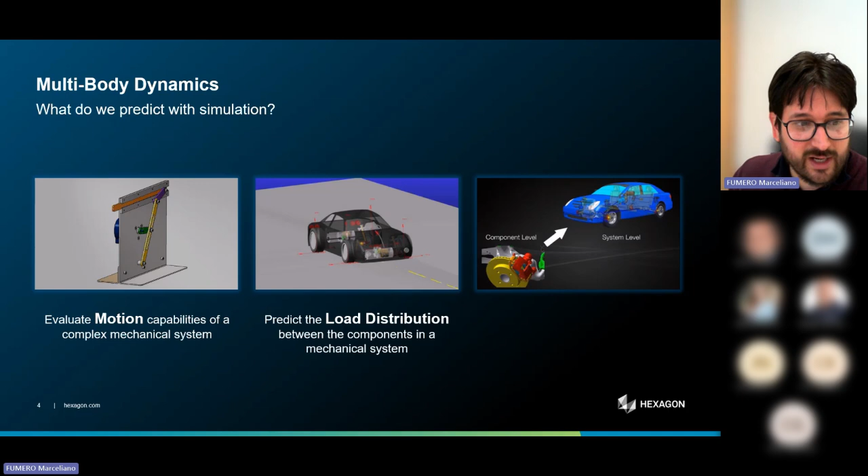I think this is how multibody dynamics was born, and then it evolved into what's probably the main usage of multibody dynamics these days, which is load distribution. When you have a system like a vehicle, for example, the loads that come through the road or the excitation from the driveline, they propagate throughout the entire system.

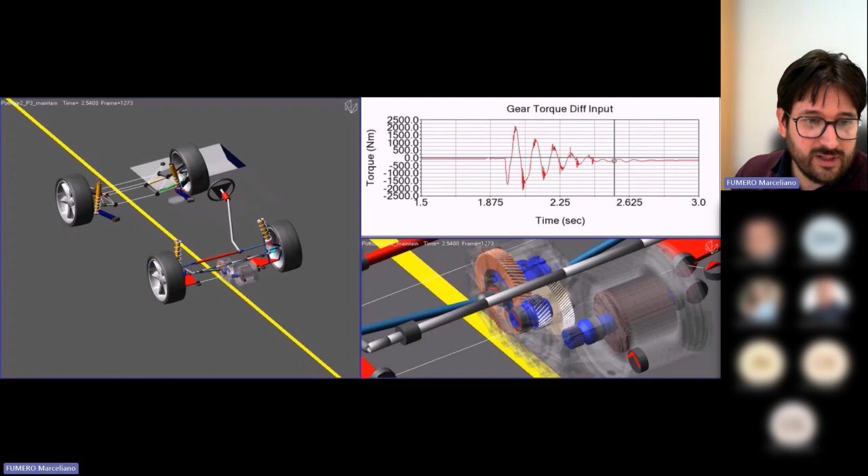And it is important to know what are the specific loads in every single component that the system has, because this is the only way that we can size and design the components appropriately for durability purposes, NVH, etc. So this is probably the biggest area of application for multibody dynamics, and Adams, of course, being part of it.

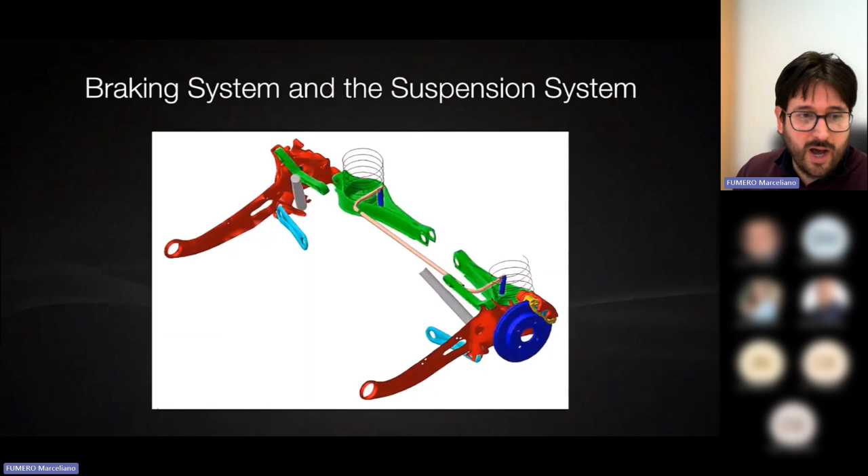And a bit of an advanced usage of Adams is understanding system interactions. So we're talking about interactions that are of a dynamic nature, maybe interactions of natural frequency in different components that can actually trigger problems in the behavior of the system. And these are really difficult to predict until the whole system is put together.

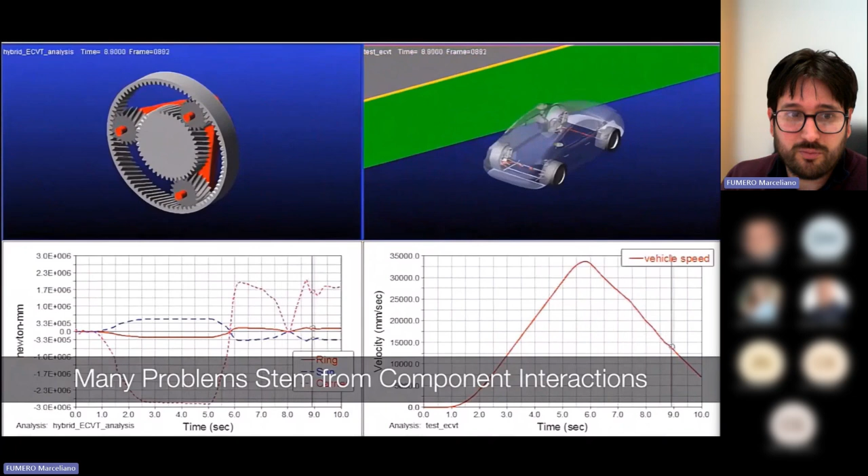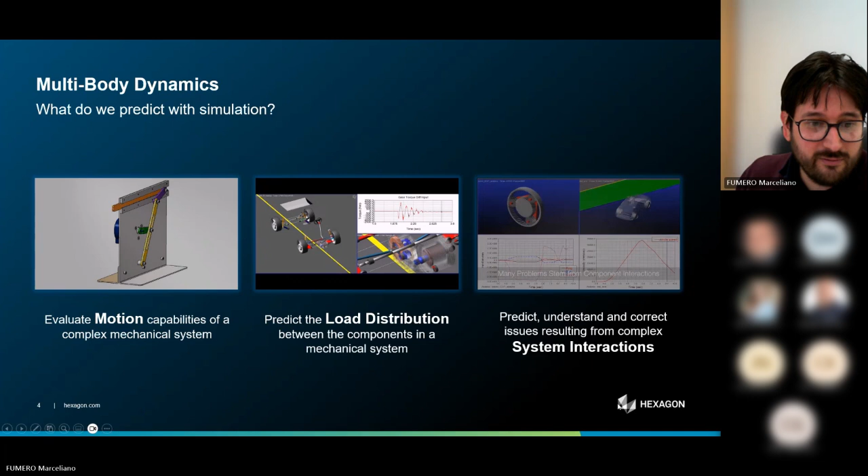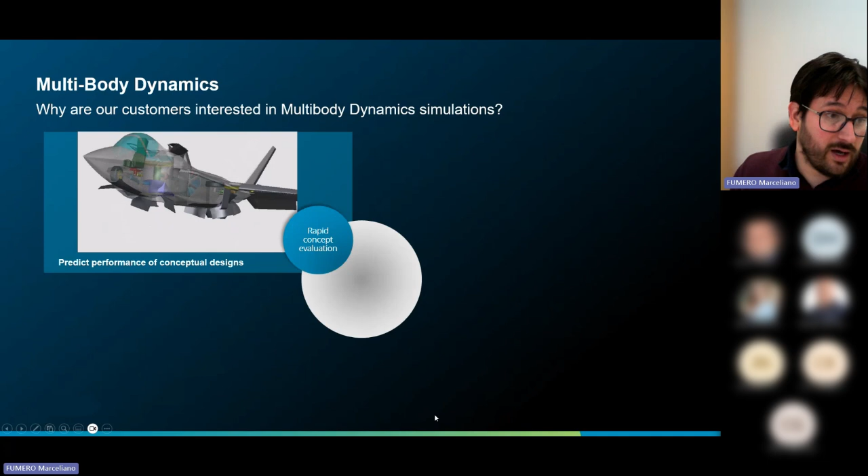So Adams multibody dynamics is a pretty good way of basically predicting problems that could arise from those interactions, and obviously evaluating changes to the design that can fix those problems. So those three things, from an application point of view, usually lead to either improving the process of defining a conceptual design for a product,

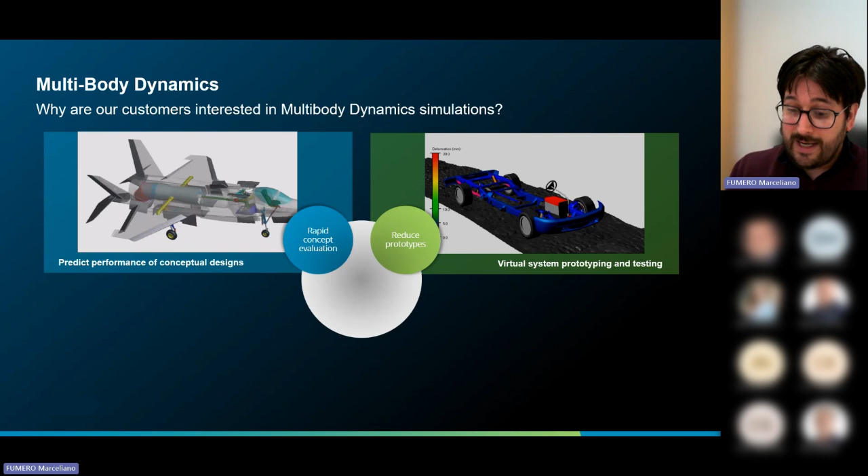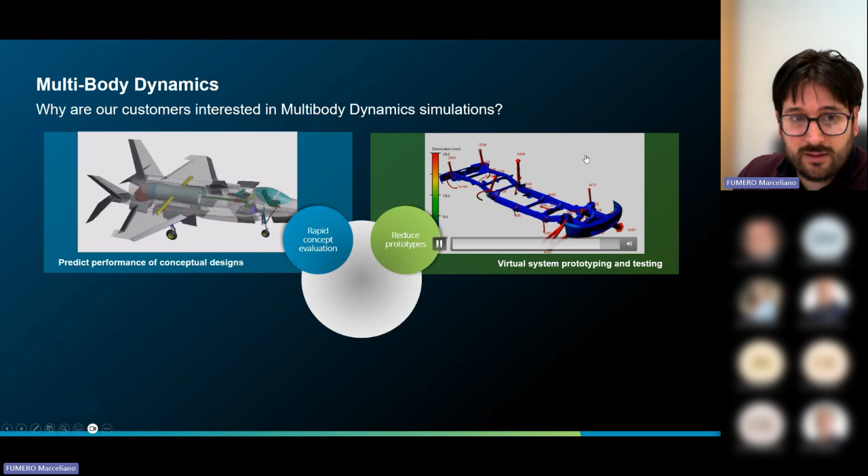reducing prototyping. Once you go after the conceptual design and you have a system that works, you need to evaluate it. Traditionally, you would do that with prototypes, but we see lots of our customers actually eliminating some of the specific test campaigns that they use, because all you have to do is basically make sure that the model is a faithful representation of the product, and then you can perform the same tests in the virtual environment that is quicker and cheaper.

Durability and NVH analysis. So this is, like I said earlier, deeper or more complex applications of multibody dynamics to find solutions to problems that involve system interactions. And finally, and this is probably one of the biggest areas of growth for us at the moment, is control design. Actually, not control design. Multibody dynamics is not a tool for the design of controllers, but the multibody dynamic models are ideal for evaluating if a controller works or not, basically.

Instead of plugging your ECU to a machine or to a vehicle, to a product, you just connect it to a virtual version of the product, where you can perform as many tests in parallel as you want, or do all the calibration and check the measurements of physical variables to see that your controller delivers the requirements, essentially.

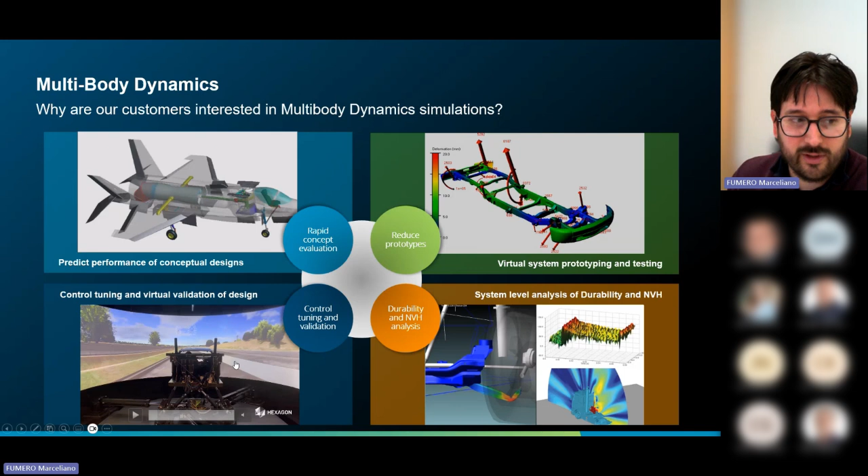So everything that I've said so far could be said about any multibody dynamics tool, and as you might know, Adams is not the only one in the market, but it is the #1 tool in the market for this. And the reason why it is the #1 tool, well, I think there are many reasons, and part of what we're going to discuss today hints into that. But I think the main reason is heritage and legacy.

So Adams is the oldest multibody dynamic tool in the market. We say that it has over 40 years in innovation, but we know we're very close to the 50th anniversary, which we're looking forward to celebrate. And obviously 50 years of development translating to a maturity that allows us to cover many different applications in many different industries. And this is really what differentiates Adams from most other software in the market.

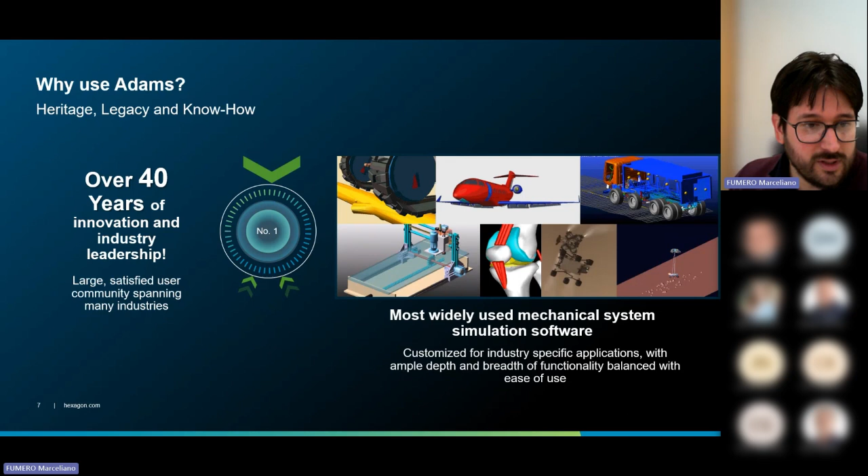A few specific, not testimonials, but projects that went well and we take a lot of pride in are, we have a use case with Airbus in which the European Aviation Safety Agency actually allowed Airbus to replace physical testing on wings with virtual testing using Adams. And this is a type of test that involves safety of the passengers. This is basically to ensure that when the wings are bent, all the actuation systems still work as intended. So the fact that Adams was trusted to replace real testing in real life for that is a big thing for us.

The trust that the automotive industry has placed in Adams is something that we're very proud of. I think we say that 24 out of the top 25. I don't know if that is still an updated case, but all the new players coming into the automotive world seem to have an interest or directly be using Adams already. So that's a big thing.

And this is a bit of an oldie, but something that we're very proud of. Adams was used to replicate the landing procedure for NASA JPL, the Curiosity rover campaign on Mars. And this is interesting because this is something that couldn't be tested in real life because obviously the atmospheric conditions on Earth are very different from Mars. So they had to rely on this virtual test in order to make design decisions. And the campaign was a success, as we all know now. So knowing that Adams had something to do with it is something that we're very proud of.

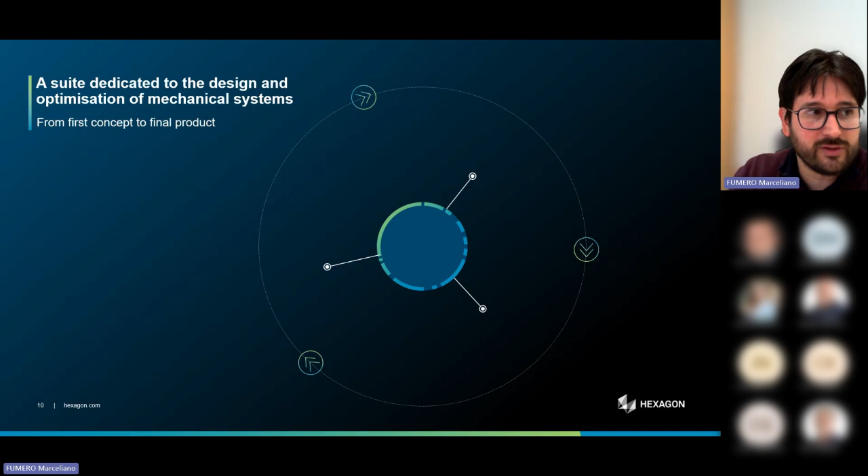So now I'm going to start talking a little bit more technical about the product. If you haven't seen Adams yet, and even if you have seen it, this might not be evident. Adams is not a standalone tool. Adams is actually a suite of products. And that suite covers solutions for creating multi-body dynamic models, including flexible bodies.

It includes tools that are dedicated for the integration of models that are not inherently mechanical, such as controls or multiphysics integration when we have loads that are generated from fluids or pneumatics, for example. We can integrate that into the entire simulation, obviously with a focus on understanding the mechanical design. But still, those boundary conditions are important, and these tools allow us to do that integration.

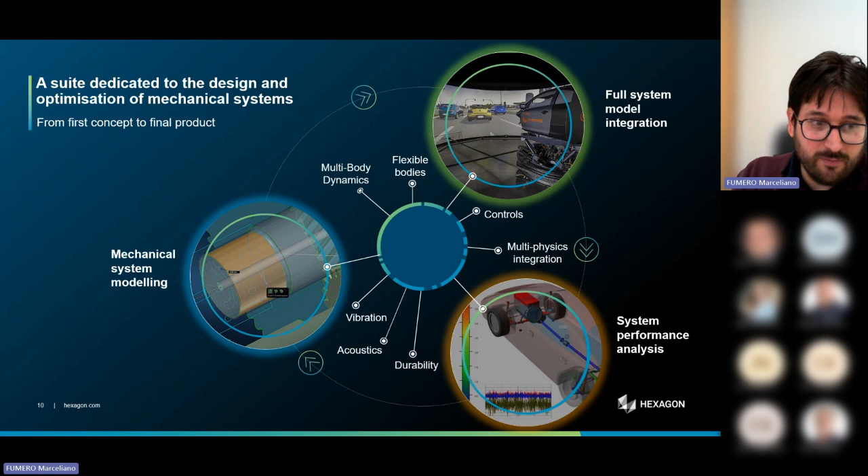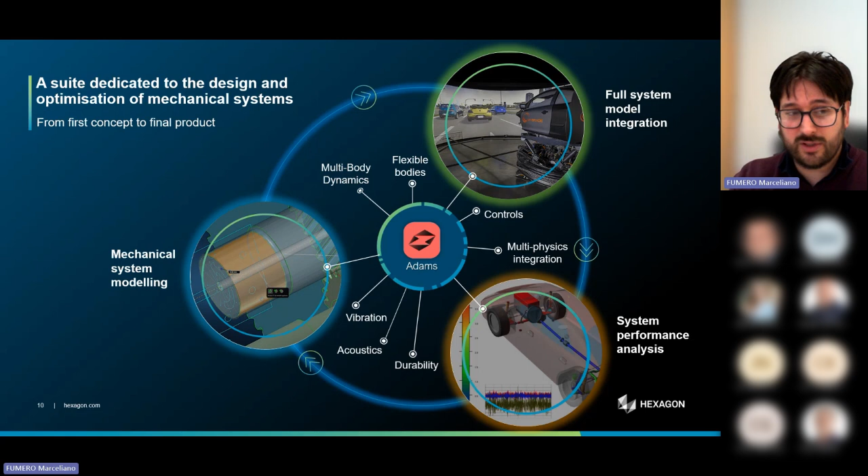And then obviously, once you have a model, what you want to do is run it, post-process the result, and that's how we get insights. So we have specific tools for the analysis of the data in order to improve durability, acoustic performance, NVH. All of that is Adams altogether. And I would like to very briefly go through what those products are, simply because when I start talking about the key developments, some developments are focused on some specific products. And it's good to know what we're talking about, basically.

So I will start with the tools that are dedicated for modeling specifically. We have Adams View and Adams Modeler. These two are almost exactly the same, but with different GUIs. So Adams Modeler was released with the intention of replacing Adams View. It's a modern-looking, more intuitive interface for Adams. But we have so many existing users that just love the Adams View interface that we had to actually keep it running in parallel with Modeler.

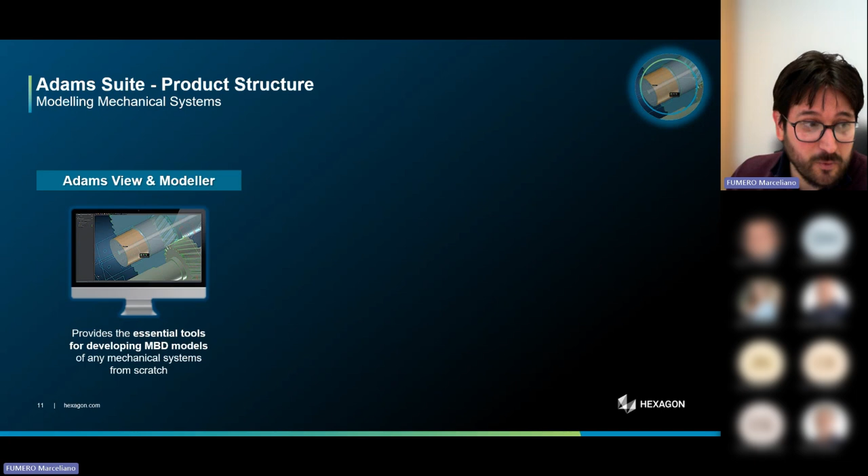So if you've never tried Adams before, I recommend you to go straight into Modeler. It should be easier to learn. But if you're using Adams View and you like it, it's there and it will be there for the foreseeable future.

We have Adams Machinery. This is actually an add-on, but it's interesting for mechanisms that are typically found in many different products, like electric motors, gears, bearings. Adams Machinery allows us to generate the models almost automatically based on parameters. So you don't have to have a CAD or geometrical data to create those models. As soon as you provide the type of data that you normally get from a data sheet of the product, the software will generate the model automatically, and then that can be integrated with the rest of the model of your machine, your vehicle, your aircraft, whatever it is.

And finally, for the automotive world, we have Adams Car. It's one of the biggest seller tools that we have. Essentially, it provides templates for stereotypical assemblies of suspensions, chassis components, drivelines, and even vehicle bodies that can be easily assembled and customized to generate entire vehicle models, which otherwise, if you were trying to generate from something like Adams View or Adams Modeler, could be done, but it would take a considerable amount of time compared to this.

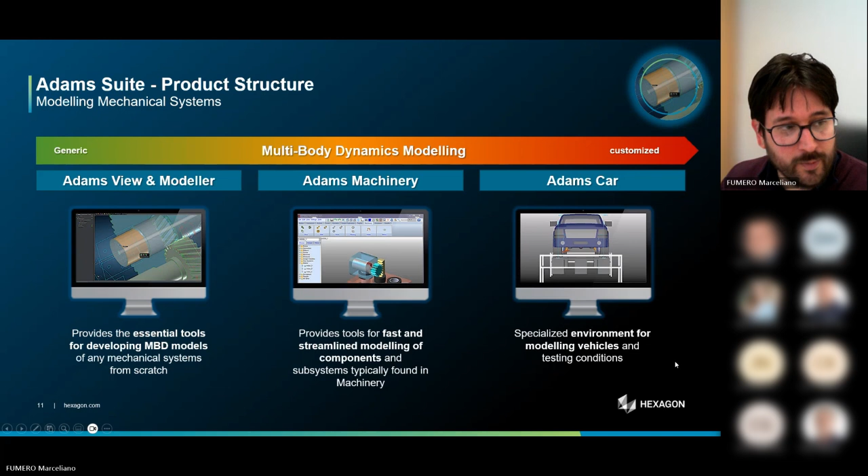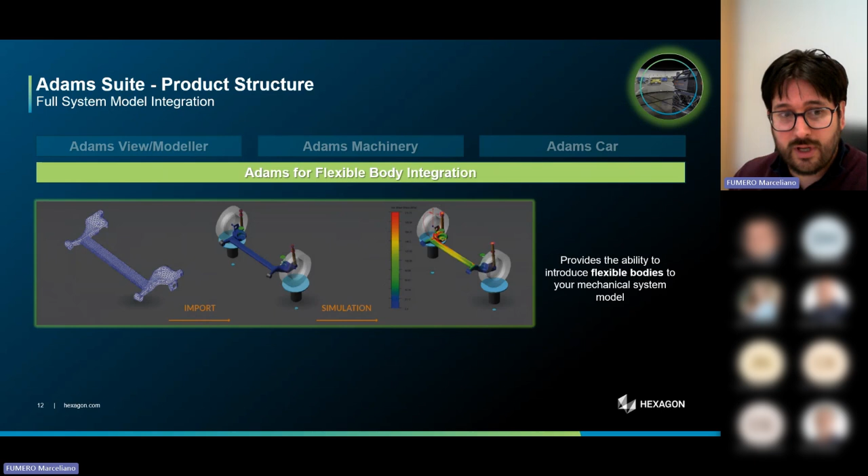So the idea of having these different interfaces is to offer the possibility to do the modeling in a generic way that allows you to model pretty much anything that moves, or a highly productive way of modeling systems that we all know pretty well. In addition to that, for all of these tools, we have what we call horizontal capabilities, and this is where integration comes in. We have the ability to integrate flexible bodies when the flexible body is expected to have a strong impact on the behavior of the system.

We have the ability to integrate controls. Typically controls are modeled in 1D. I'm not sure if you're aware of that, but 1D offers a pretty good platform to model both the control logic and the actuation system, whether that actuation system is electrical, pneumatic, or hydraulic. So once you have that full definition of how the controller works, you can plug it into the mechanical part of the system, which is what we do in Adams, and then you have a full representation of the product in the virtual world.

Equally, we can actually take that entire system and export it into what we call real-time simulations. I'm not going to talk a lot about that because a big part of the development of 2024 and 2025 is related to real-time. So we'll be going through that in a fair amount of detail in a few moments.

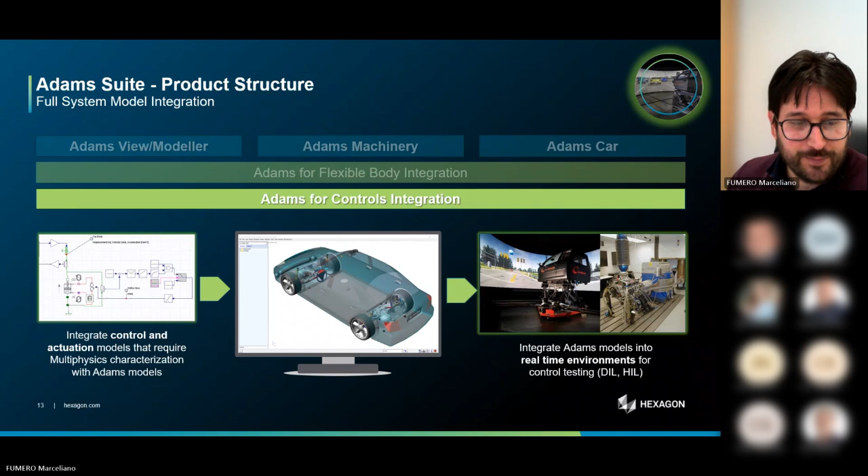We have tools for advanced co-simulation. This is where we leverage our relationship with other tools like Actran, Cradle, etc. And this is mainly to define, in most cases, boundary conditions. We have the ability, for example, in heavy machinery, to characterize solid to soil contact in order to have a good dynamic definition of how operating conditions like the one in this video will be.

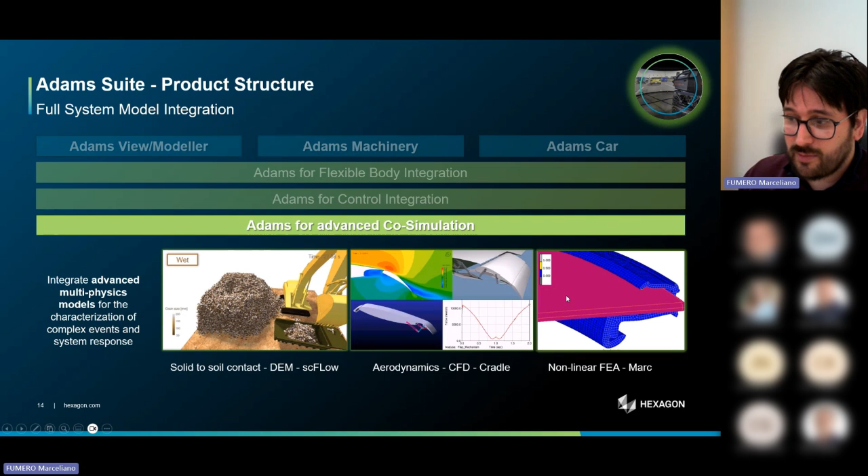We have the possibility to introduce aerodynamics or fluid loads that affect the behavior of mechanisms, as we can see in this little video there. And then within the mechanical model itself, we have the possibility to integrate non-linear deformations. For example, this is a window going through the rubber that covers the window in a vehicle, and the resistance of that rubber is highly nonlinear. Characterizing that in Adams requires the multibody dynamic aspect of it and the nonlinear behavior in order to get a good representation of what is happening.

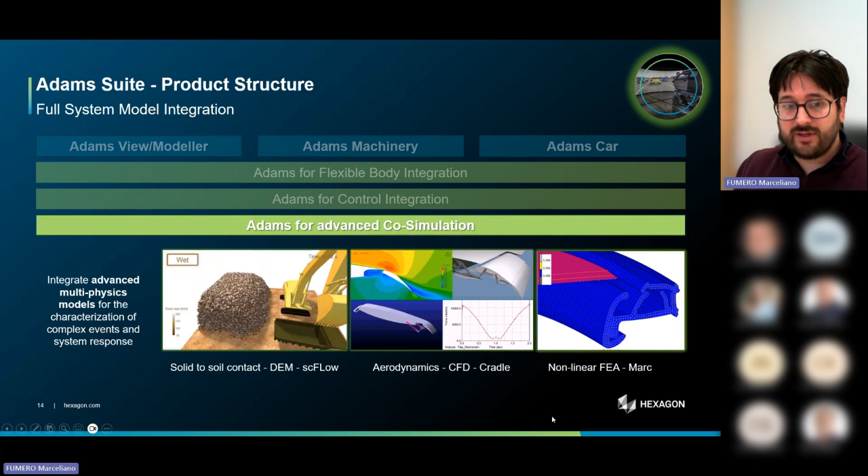So that covers everything that is related to modeling. And then, like I said, we have tools dedicated to the analysis of those models. In its basic form, we can animate the system. We can plot the transient results in order to get insights into what is happening. This is pretty much like looking at the results from a real prototype in a test bench.

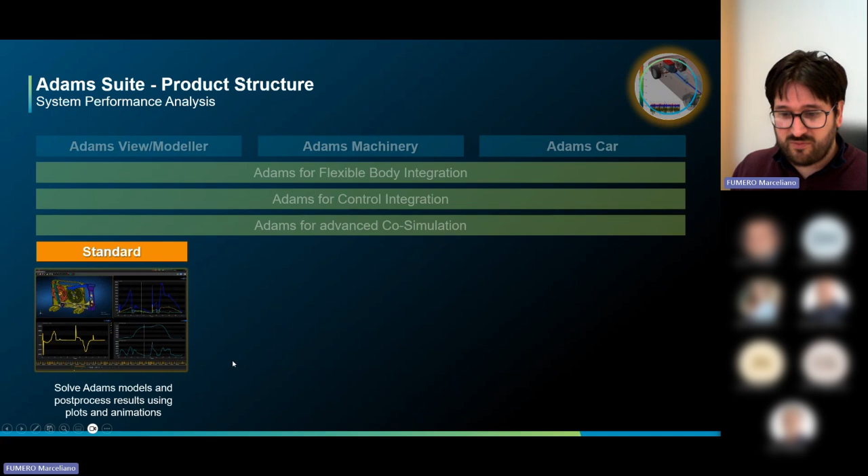We have tools that are dedicated to doing durability analysis. Vibration analysis, once again, I'm going to be talking a little bit more about vibration and acoustics later. So if you didn't know, this is something that multibody dynamics also covers. And once again, it's an area of focus at the moment, or growth, when it comes to the development of the product.

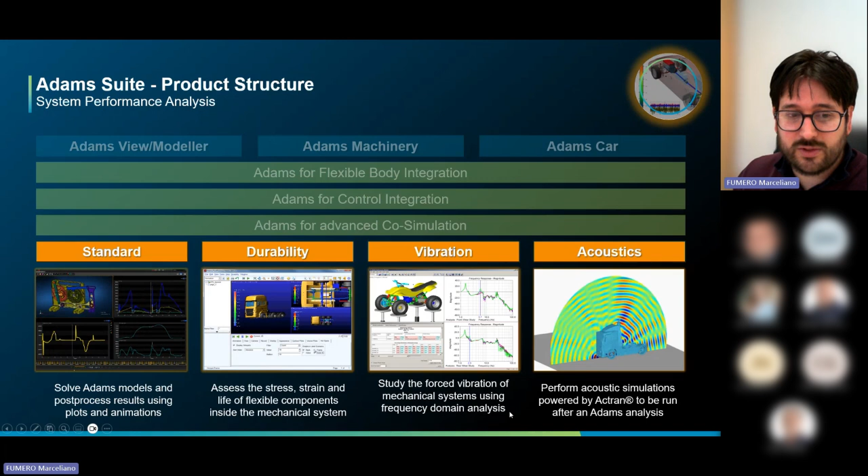So that takes us to what are the key developments in Adams for 2025. I say 2025, but some of it, especially the real-time conversation that we will have, also covers 2024. This is something that has been evolving very rapidly over the past couple of years. But it's still in a phase where lots of customers are just finding out about it and adopting it. So I think it's a good opportunity to talk about that.

All right, so there are 3 key areas of development that I'm going to cover today. The first one is Adams going into the cloud, and this is probably the newest thing that I will be discussing today, because it's something that we never did before. Up to now, Adams is on your machine and nowhere else. The intention, like with many other software, is to move a lot of this capability into the cloud, eventually giving you access to Adams fully through a website. But we are not there yet. So today I'm going to explain what this initial implementation of Adams in the cloud is and how it can help increase productivity, agility, and collaboration.

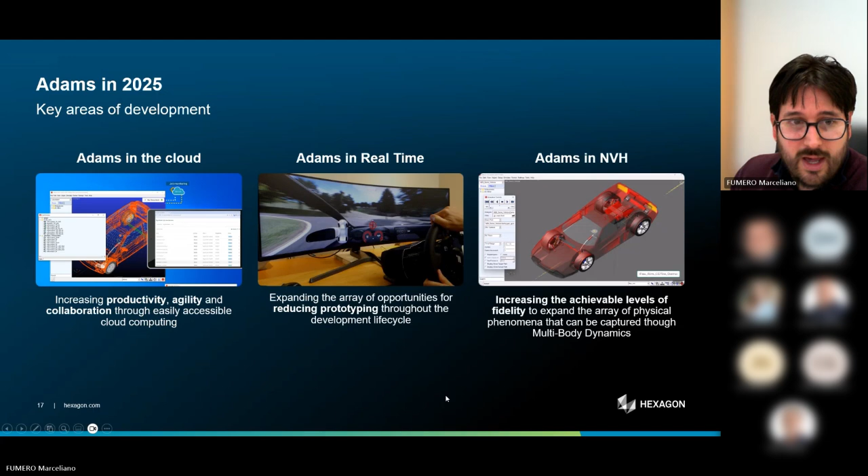Then, like I said, I will discuss in more detail what Adams in real time means and how you can use it for the benefit of improving the design process and reducing prototyping. And finally, Adams for NVH. This is not new to us. This is something that has been done for quite a while. But because NVH, acoustics, vibration, requires higher levels of fidelity in the model, and in some cases capturing complex physics in the model, it's something that is always evolving.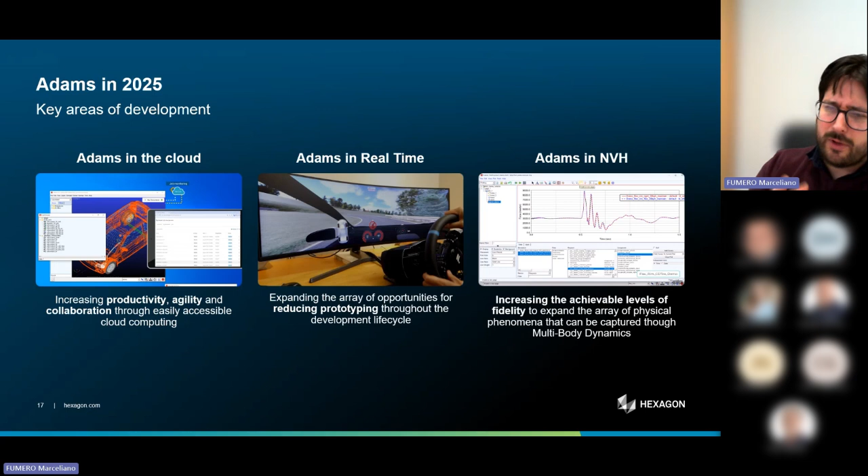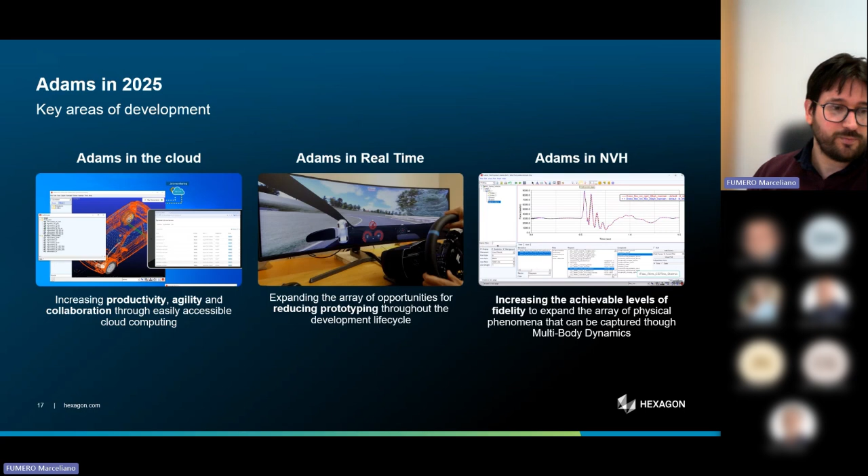Essentially, customers keep coming back with new challenges for us, and we basically implement new features to make sure that we can use Adams for whatever our customers need. So I will be covering a few specific developments that are aimed to improve not the accuracy, but the fidelity of the models that we generate in Adams. So let's dive into there.

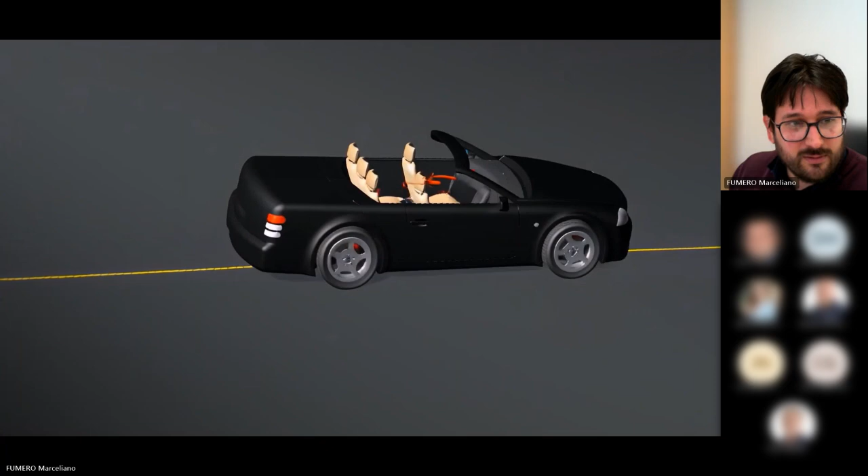First of all, I'm going to talk about Adams in the cloud, and this is funny. This is a video that is about to be released online. You're the first ones to see it, and it's just a teaser to what is coming. So coming soon, to be very specific, means, if I remember correctly, I think it might be the 17th of next month. So it's very soon, less than a month away from the release of this capability. Oh, sorry, move forward.

So what's Adams in the cloud? I don't know if you have heard about Nexus so far. I'll show you very quickly what that is. Nexus is the portal that Hexagon has been developing over the past few years to interact with the customers online. So if you are a customer of Hexagon, you should be able to access this site and sign in. And in there, you will find lots of things, really.

You can download any software you like. If you don't have the licenses, obviously, you cannot use it, but you can request licenses through the site and initiate a sales conversation with us. You have documentation for the software. Let's see if I can find the product, maybe.

Oh, lucky for me, Adams is one of the first ones. So if you go to the Adams site, for example, this is where you can see a bit of information about what it does. It will give you a link to our documentation center. It will point you towards other tools that closely relate to Adams. And it will give you access eventually to Nexus Compute, which is what this implementation is all about.

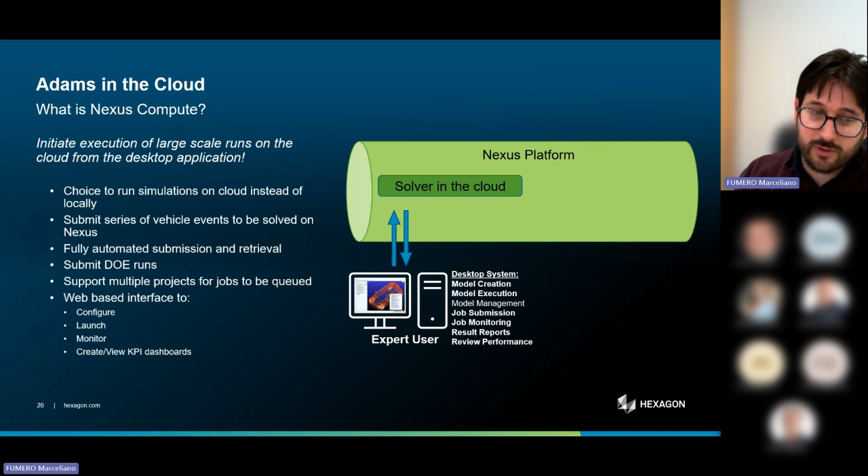With Adams in the cloud, what you can do is click run, send it to one of our servers. The model gets run in there, and the results are sent back to you. I'll tell you in a minute why that is useful. But before I get there, the other thing that you can do at the moment with Nexus Compute is to take the results, and instead of doing plotting with the Adams post-processor, we have dedicated post-processors on the cloud that can be used to manipulate the data that the model will generate.

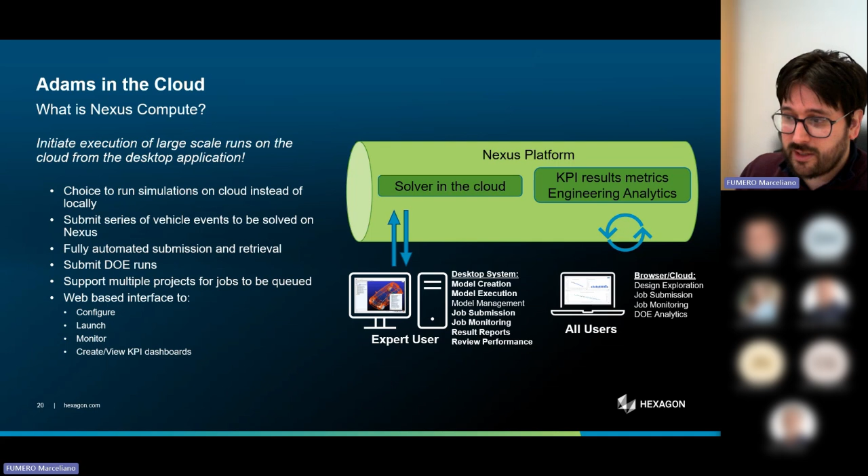So why is that useful? Well, let me show you the 3 applications of this. One thing is what we call just run it. I want to show you a quick video of how it works. So as you can see, in the next release of Adams, you will have this Nexus button in there. If you have a Nexus account, you can log in.

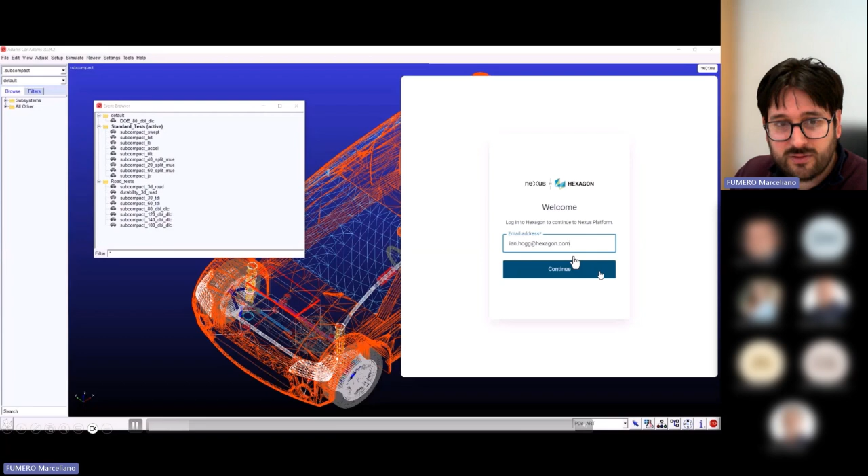You can have a project or a place where your data and your models will be saved. And then from Adams in your desktop, you can send or submit your jobs into the cloud. So this is very similar. If any of you has ever used a high performance computer that is installed as a server in your organization, this will be the same, but instead of going through an internal server, it goes through our servers. And essentially we will charge for the amount of time you use the server.

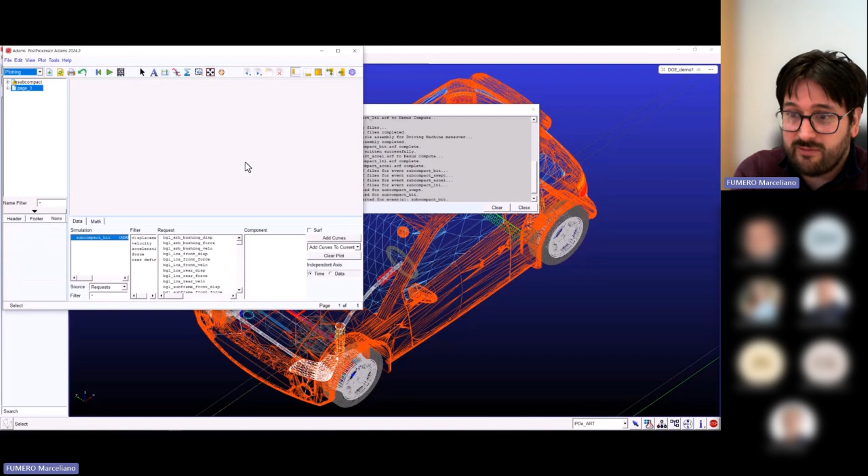That's it. In a situation like this one, the one that we're looking at in the screen, where you are simply running your model in Nexus, the only advantage you get is that if you have a model that takes a long time to run, and as you know, especially when you include flexible bodies, models can take up to hours to run, your machine doesn't have to be locked in the simulation. If you send it to the cloud, the machine is free for you to continue doing modeling work, anything you need. And when the model is ready, it's sent back to you.

Also, the high performance computers that we have in the servers obviously will reduce the running time considerably compared to a normal desktop or a normal laptop, which is what we normally use. And as you can see, sorry, I missed something from the video while I was talking. Yeah, the results can be retrieved back and analyzed in Adams just like you would if you were running in your own machine. So it's not a major disruption. It's just a tiny step simply to make sure that you don't lock your machine there.

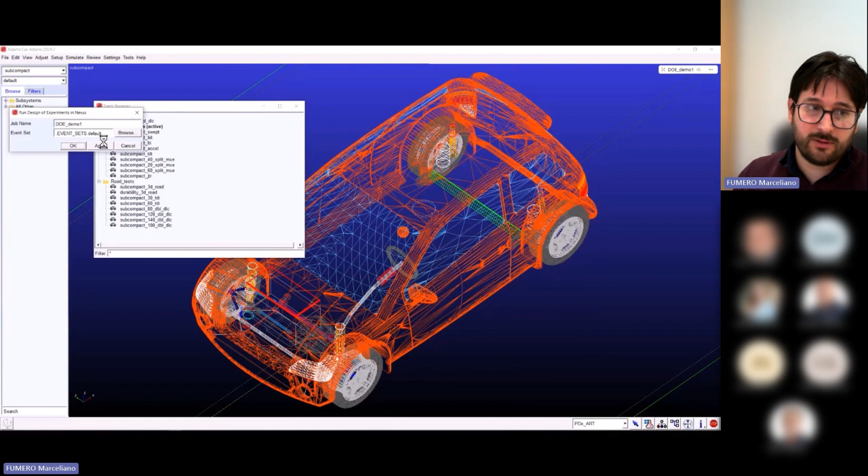This is useful, but this is very useful for DOE. So now when it comes to DOEs where you have multiple runs, running in high performance computers gives you the ability to make many runs in parallel. And if you have a big study with a large number of runs, this can reduce the overall time of getting the results dramatically, from maybe days or weeks to hours.

So as you can see in the video, when we run it this way, the model is sent to Nexus and all the parameters in the model become available in the Nexus interface. So in there, you can decide which parameters you want to use for your design of experiments, which is what is happening right now. You can define, just like in any optimizer or design of experiments facility, the maximum value, minimum value, the type of how you want to use the data.

Once you define the scope of your study, which is about to happen very soon in the video, you move into defining your objectives or the outputs that you want to generate from this study. In this case, we call it KPIs, and this is what is happening here.

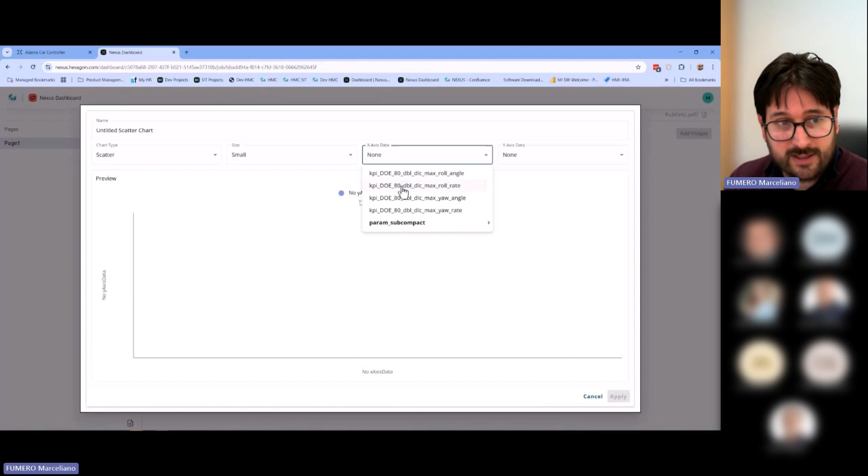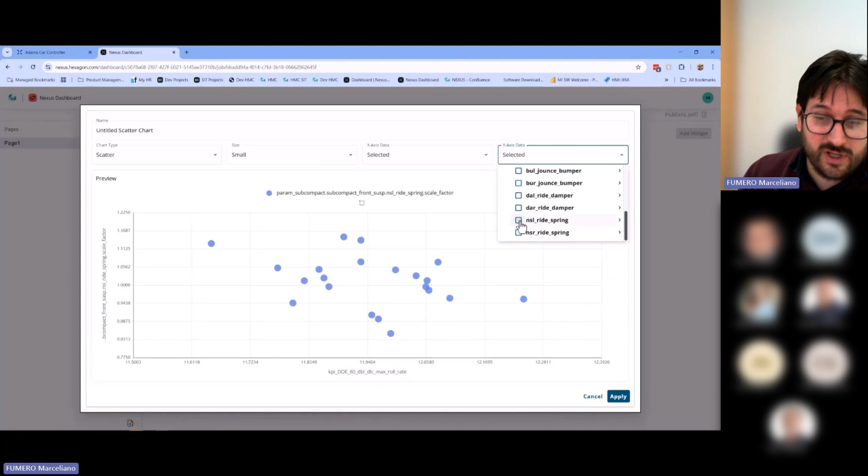What that means is that if you submit a model into Nexus, someone who doesn't really know how to model or who doesn't have any experience with Adams can still use that data to assess whatever they need to assess in order to make engineering decisions about the product. So it's a great way of sharing the CAE work with people who are not necessarily experts in simulation.

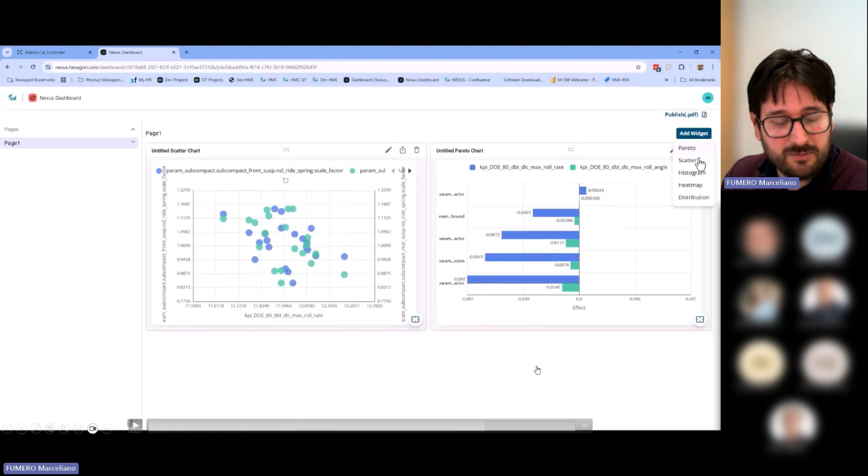I'll stop here because there's nothing interesting to point out. All you will see is a bunch of different types of plots that we can produce, which are really nice, but without context they might not mean much, I think.

Okay, so with that said, this is what Adams in the Cloud is all about for the time being: increasing productivity by freeing up your machine and accelerating the time to get results.

Same thing with DOEs, but in the case of DOEs, this is more about agility. Typically our customers don't do DOEs every other day, but when they have to, they might feel constrained by the computational power they have available.

So this is an easy way to say, okay, if I have to do a DOE, I'll just get my credits, submit my work, get my results, and I don't need a high-performance computer, or I don't need to install Adams on a high-performance computer. It's that simple, basically, and once you use it, if you don't need it anymore, you can forget about it.

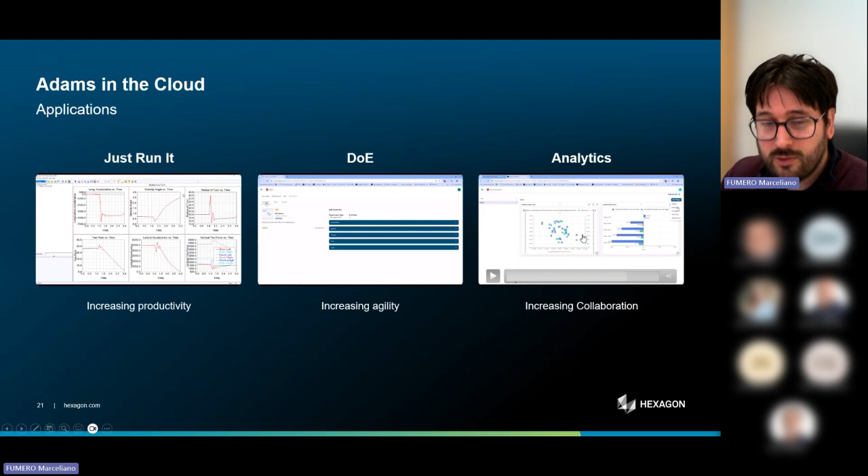And the analytics part of Nexus is all about collaboration, really. It's basically providing an agnostic place where all engineers, whether they have a simulation background or not, can look at results and make decisions together.

Okay, so now we will jump into the next topic, which is Adams in real time. What we're seeing in the video is actually a simulator where the forces applied by the simulator are being calculated with Adams in real time.

What is real time? What is Adams real time?

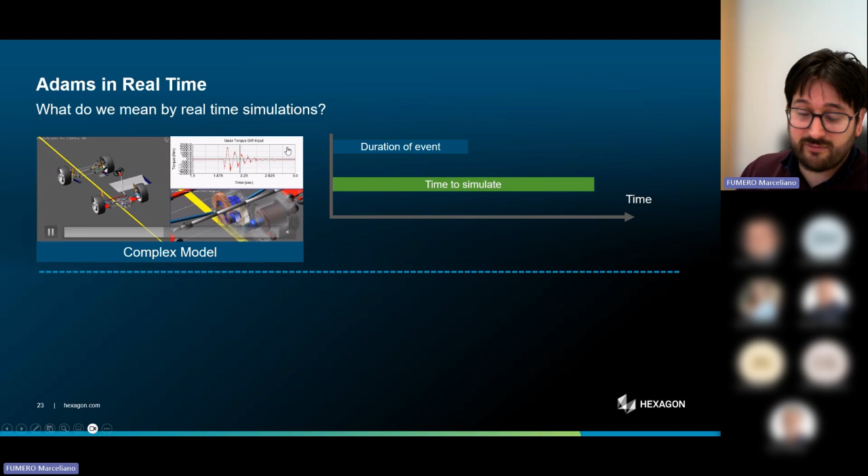If you're not familiar with the concept of real time, you'll know that when we simulate events that belong to the real world, if the model is complex, like the one on screen with many components, complex contacts, and flexible parts, it's likely the time to simulate the event will be much longer than the duration of the event itself. Opposite to that, if you have a very simple model like this one, where you have a flap that goes back and forth, it's likely the simulation time will be faster than the duration of the event itself.

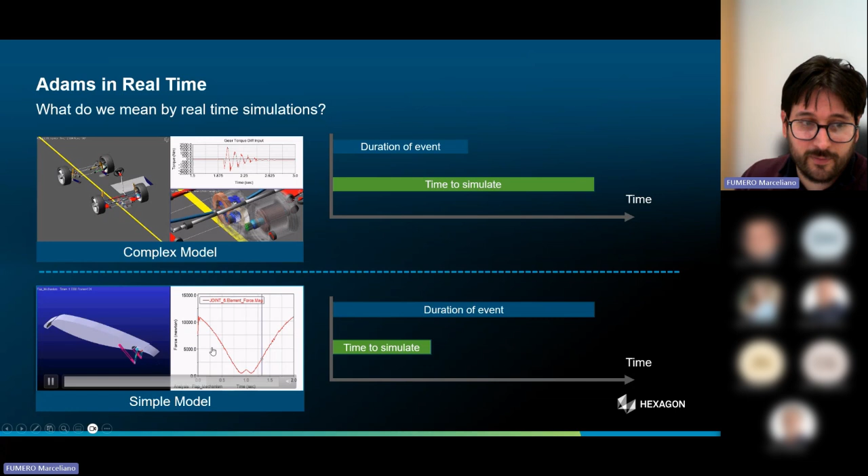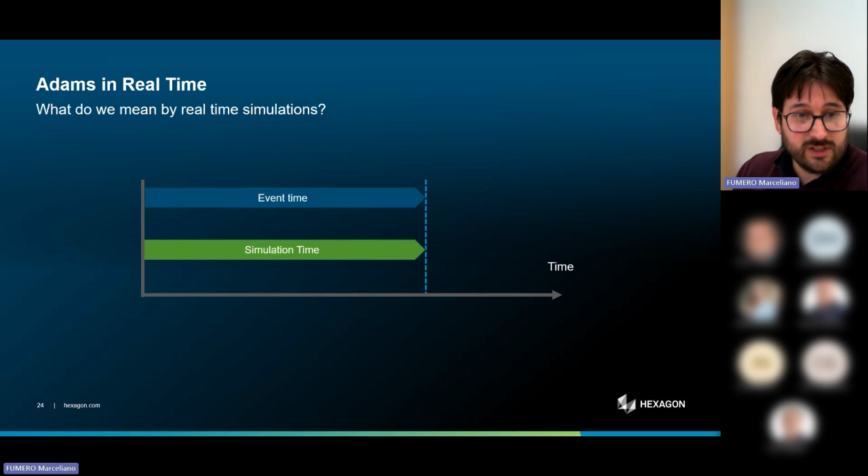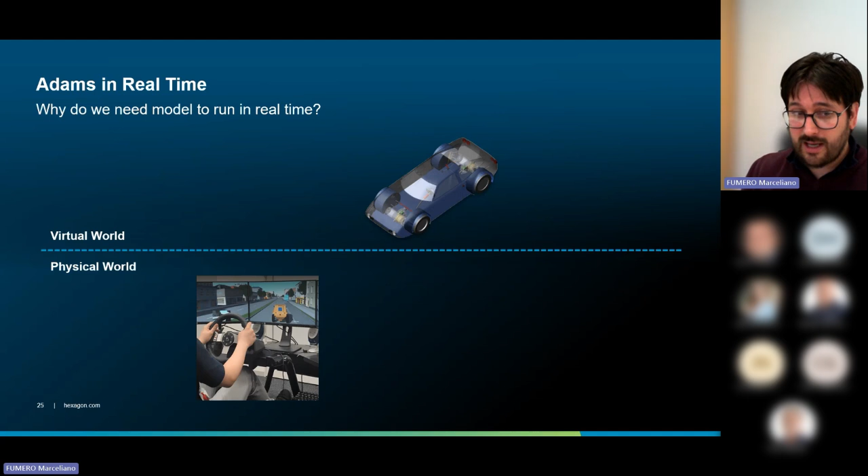Real time is about matching simulation time and the duration of the event being simulated. The reason we might be interested in doing that is to connect the virtual world with the physical world. Examples of that might be what we just showed you, simulators, where you as a user of the product can interact in real life with the product and generate data.

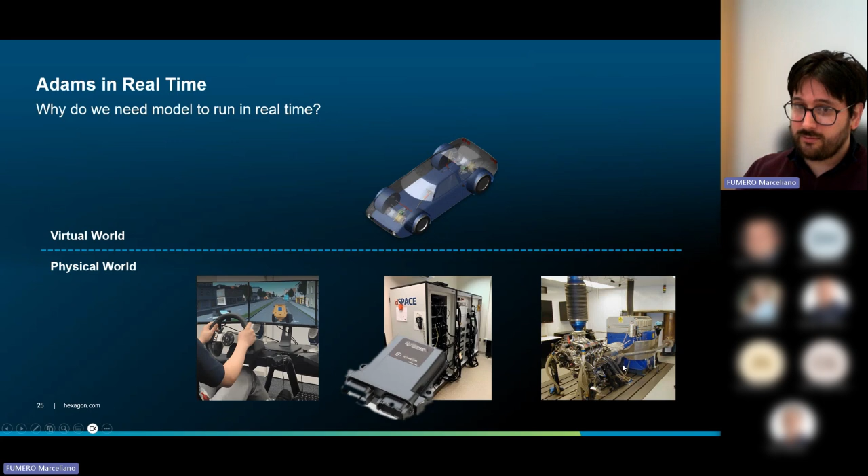We have some cases, I'm going to talk about this in a minute. This is a little abstract, but once you see it, it's very interesting, which is characterizing the system using models and real parts of the system working at the same time. So let's dive into that.

But before we get to the applications, I'll explain the implementation of Adams real-time. Essentially what we did was implement the real-time solver. This is a solver where we've increased the performance, reliability, and the way the model is solved, in order to make sure the model solves at the same time as the wall clock, and that it does so without breaking throughout the simulation.

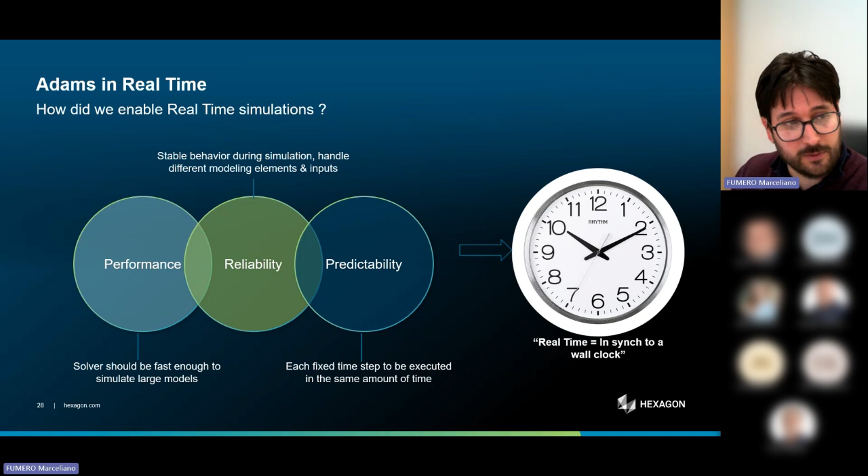Another implementation necessary to get this done was what we know as real-time FMUs. If you're not familiar with FMUs, I recommend finding some information about it. It's essentially a standard to connect dynamic models from different sources together. There are specific rules that apply to connecting models that run in real time. This implementation allows us to take a model from Adams and mix it with other models and systems that work in real time.

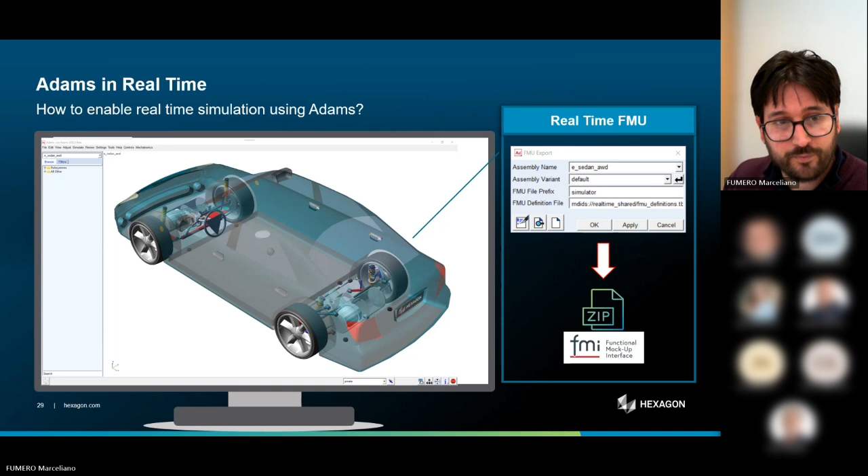And that leads us to the applications. I think the main application of real time in reality is controls. Like I said earlier, if you want to evaluate whether a controller works or not, typically you have to connect it to a prototype and perform certain tests. With Adams, you can do those tests virtually.

So you have your real ECU, you connect it to one of these machines called hardware-in-the-loop machines. What they do is translate analog signals into digital signals that the model can interpret, and then the signals from the model, which are digital, are translated back into analog and sent to the ECU. That's how we establish the connection between those two. By doing those connections, you can do testing in the virtual world.

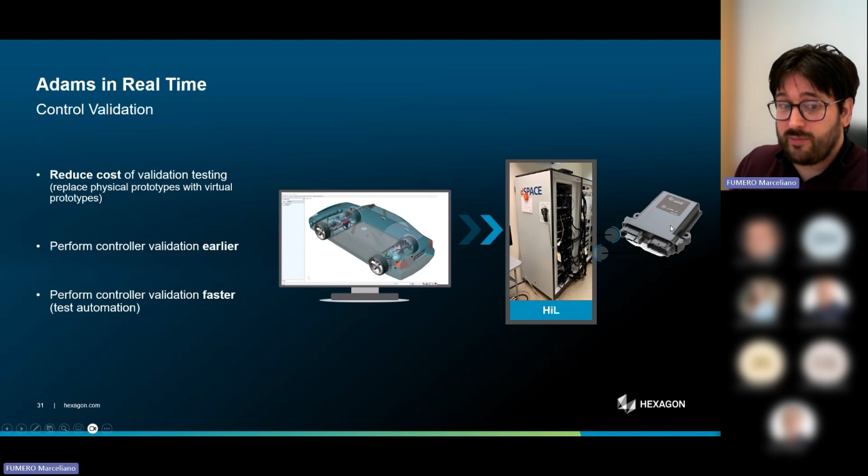An example of that is JLG. This is a company in the US that deals with these machines you can see here, called telehandlers. Probably in construction sites or electrical cabling in the street, you've seen these telehandlers get workers close to whatever they need to fix and then bring them back, or materials as well.

With telehandlers, according to what JLG explained to us, whenever you make a change to the design, you need to reevaluate the control, because the control makes sure the thing doesn't flip when in operation. Apparently this happens very often before they release the design. So they said that by having a correlated model in Adams of the telehandler, they can make modifications to the design and simply run the tests, which they've already automated online with the ECU, to make sure the controller still does what it needs to do.

They managed to reduce the time to do those tests by 90%, which is not a surprise because they have to run many tests. In real life, each test requires a very complicated setup, whereas in the virtual world you can just run them automatically, overnight, with no need to set up anything. So for them, it's a really big deal—something that has helped them drastically reduce the lead time for the delivery of new designs.

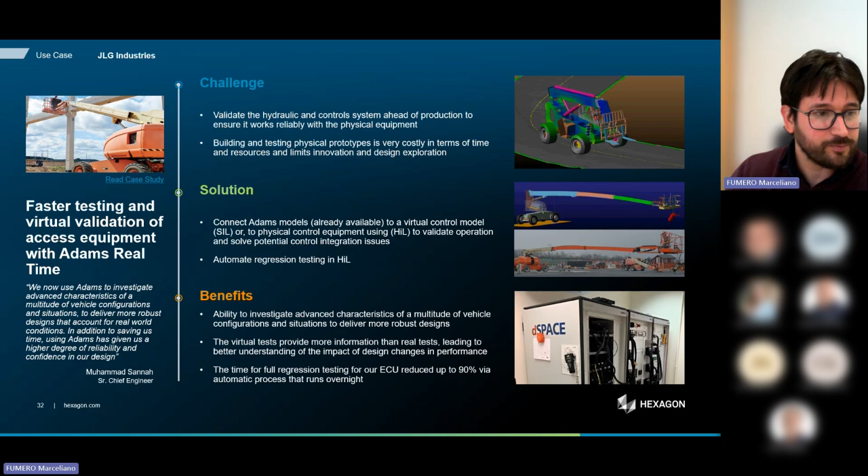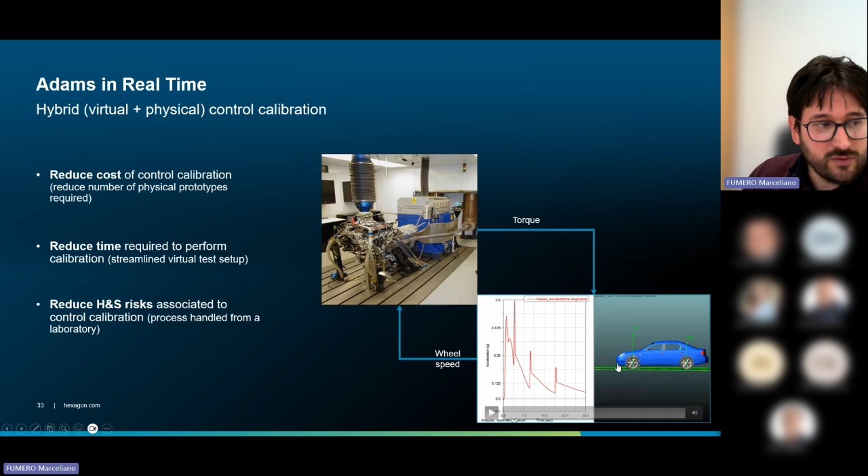Another application is what I mentioned earlier, which is what we call hybrid testing. In this case, for example, you can have a drivetrain connected to a test bench with a big electric motor. This electric motor simulates the loads from a vehicle being simulated in Adams. To explain how it works, the best use case is a public one we have with Ford.

They told us they have a single driveline used in many different cars. The driveline design doesn't change, but the calibration of the controller is very different. If we wanted to do the calibration in each vehicle, we'd need to generate a full prototype of the vehicle and test each one individually, which is very slow. But with Adams, they can simply connect the drivetrain to an electric motor, then just change the vehicle modeled in Adams and do the calibration virtually.

Once again, this helped them save a huge amount of time in the calibration process of their drivetrains, with significant reductions in prototypes, because the prototypes were simply used to validate the design and not for calibration or verification.

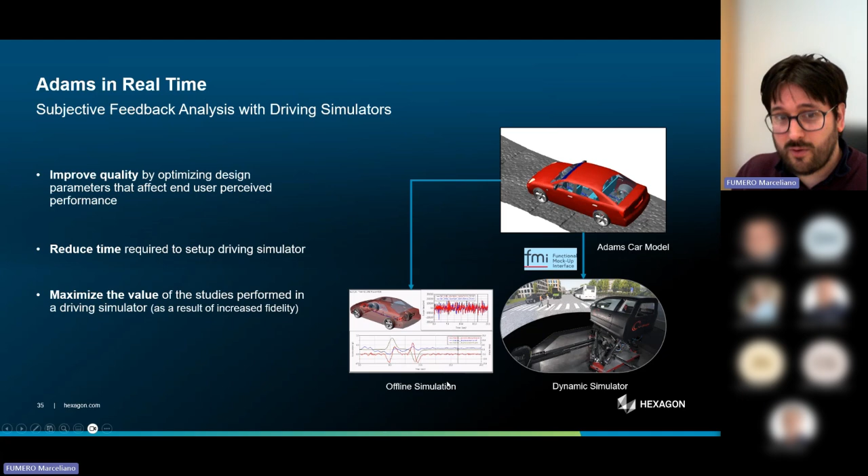Finally, another application of real-time, which is quite sexy in my opinion, is the use of driving simulators. We have a couple of use cases where the driving simulator is used at the conceptual stage of design, trying to capture subjective feedback from end users at that early stage. This is quite important for suspension design because the feel of the suspension is part of the signature of the product. Usually it's the thing you evaluate at the end when you have a physical prototype to put drivers into, but through the dynamic simulators, you can get a response from your design early on and validate it to make sure it will please the customer.

For this one, we have more than one case study. The latest was with Hyundai, where they were trying to optimize lap times—more of a sporty type of application. But we also have a use case with Mahindra, which was focused on improving comfort at the concept stage.

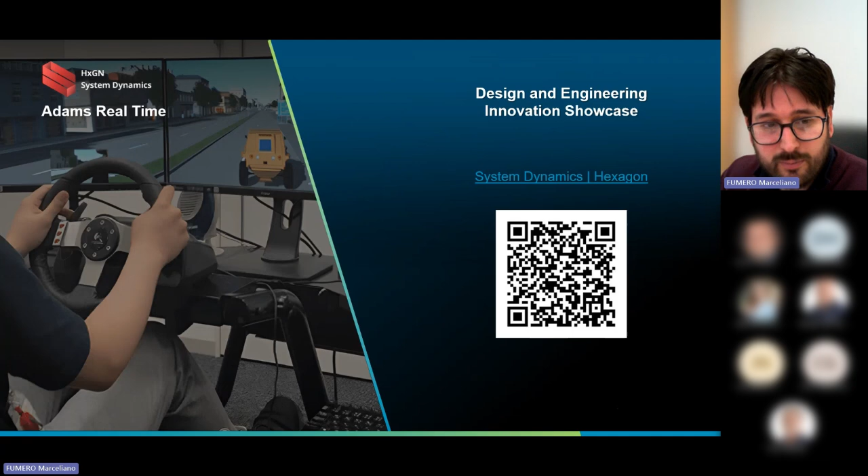Now we're going to the last bit, which is Adams for NVH. Like I said, this is not new to us—Adams has been used for NVH for quite a while. But let me mention something in case you didn't know that Adams is used for NVH. The reason people sometimes don't know this is because Adams is a time domain tool, not a frequency domain tool.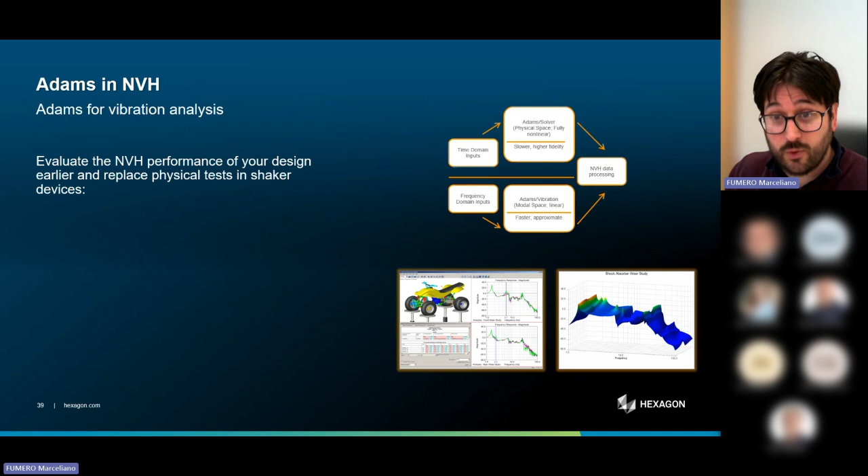What most people don't know is that Adams models can be linearized at any point in time. Once they are linearized, you can apply the typical analysis you do in the frequency domain in order to understand the dynamic behavior of the system.

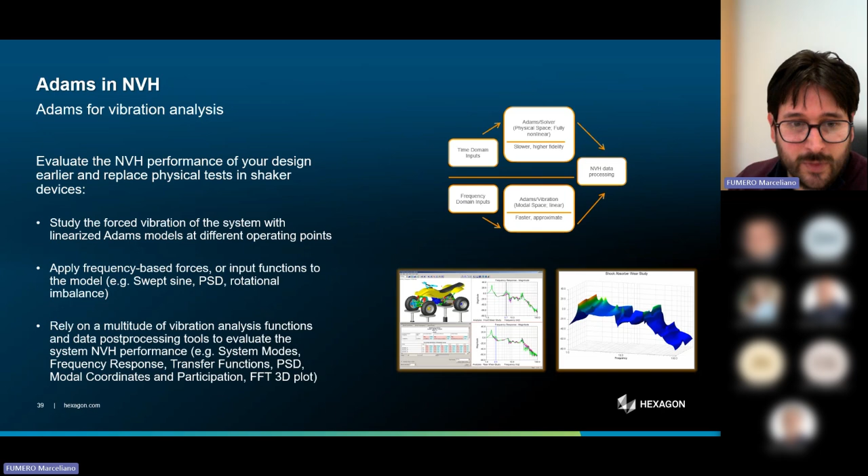In addition to that, Adams has the capability, especially through flexible bodies, to predict acoustic performance. So if you have a system like this one, the vibrations generated in the hub—this is a cut down version of a wind turbine.

But the vibrations that are generated here, plus the vibrations or excitations generated in the gear train, will transform into sound that is propagated through the case of the gearbox. This is what we're looking at. And how that sound propagates is something that we can characterize via Actran. Normally, you would export this FE component into Actran and do that simulation there.

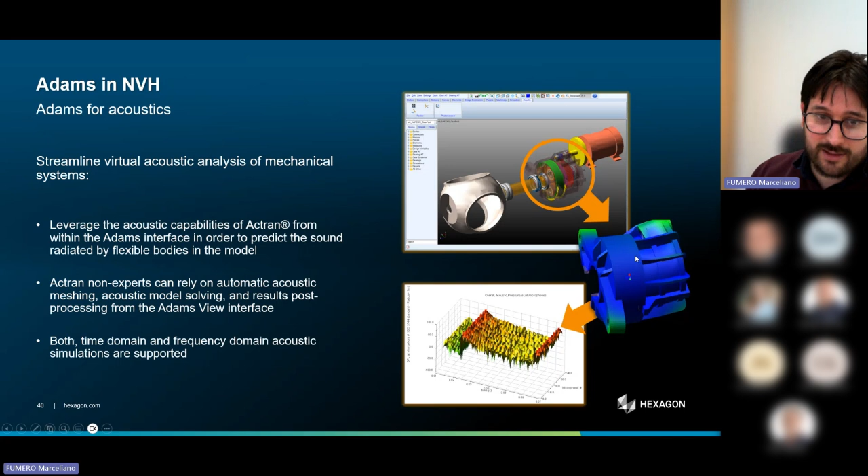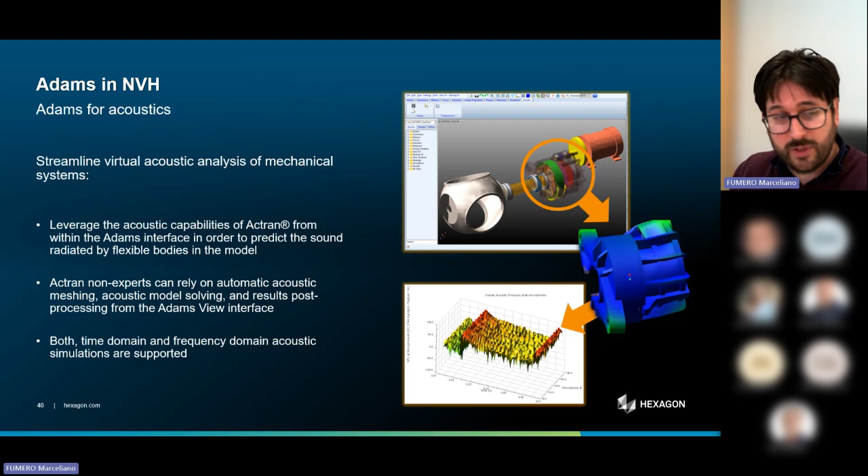But these days, we have embedded capabilities of Actran in Adams that allow engineers who don't have a lot of experience with acoustics to still define simple experiments, let's say, and essentially check the acoustic performance of the design. Now, the thing here is that this requires the model to be accurate at high frequencies, because sound, as we know, unlike vibration, requires a higher level of fidelity in the model. So that is leading us to implement new capabilities.

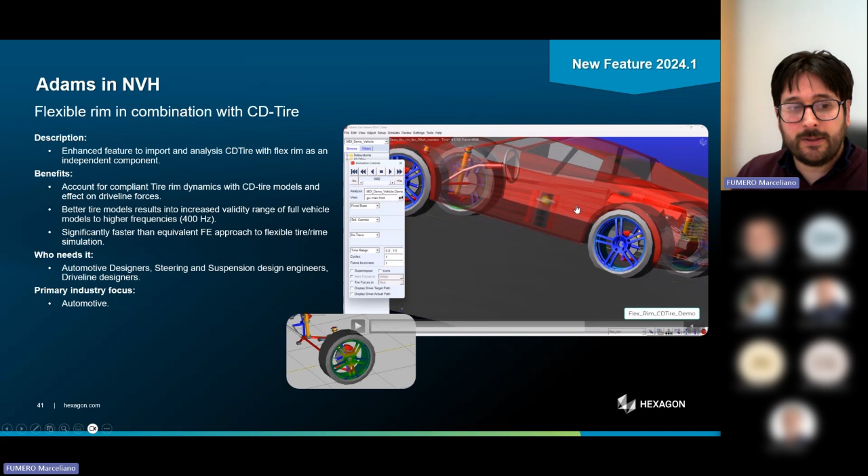One of them, for example, is this one, which is making rims in tires flexible. Okay, we'll move forward in this video a little bit because we're short in time, but as you can see, the rims being flexible, obviously the flexibility of the rim compared to the flexibility of the tire means that from a functional point of view, this is not going to change the load dramatically, but it will introduce high frequency vibrations due to the stiffness of the rim that can be perceived as problems in terms of noise or in terms of comfort inside of a vehicle. So this implementation was made specifically in order to increase the frequencies that can be evaluated for suspension design.

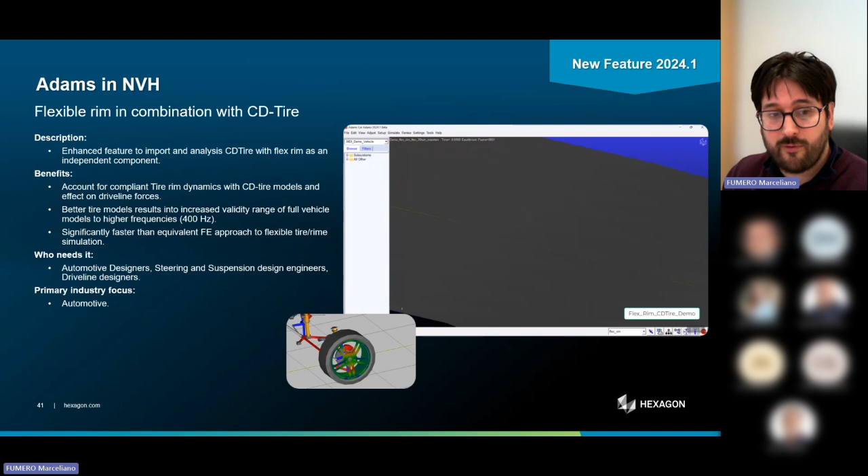We also have introduced new capabilities. This just came up in the latest release, 2024.1, in order to get more information about the acoustic characteristics of bodies within the model.

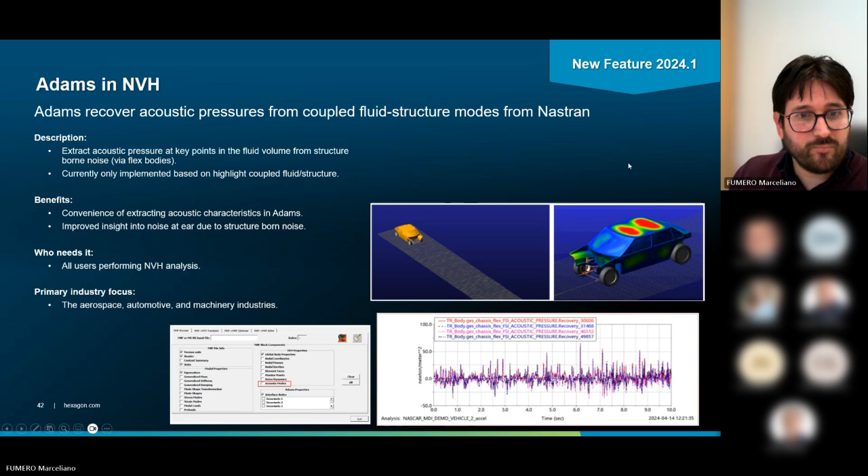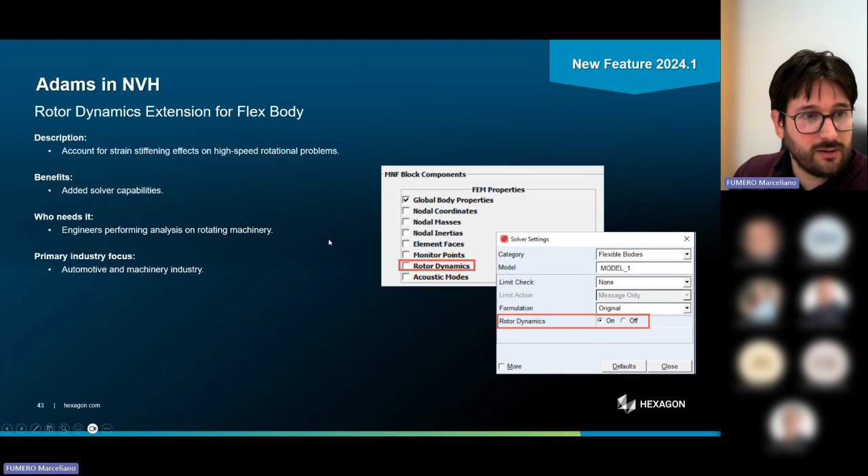So before I move forward, as you can see, it's not a simple development that led us to do more NVH. When it comes to NVH, what we're doing is taking information from our customers about things that look little, but they are not. They are necessary in order to get accurate predictions of performance, and we're acting on those.

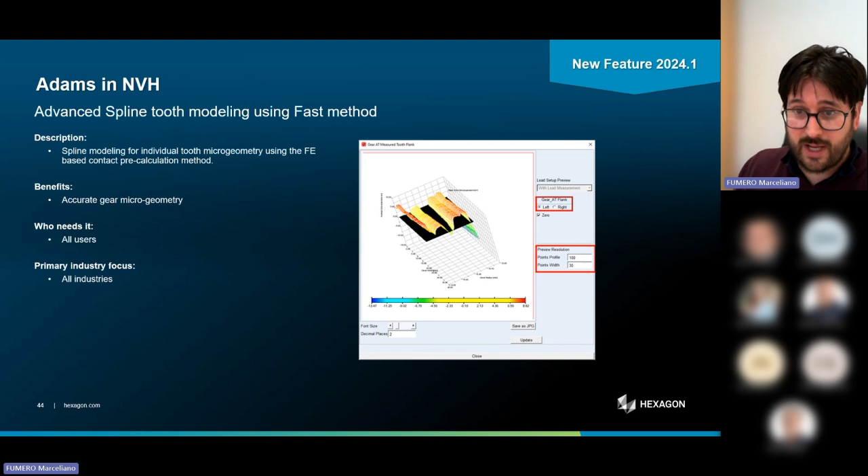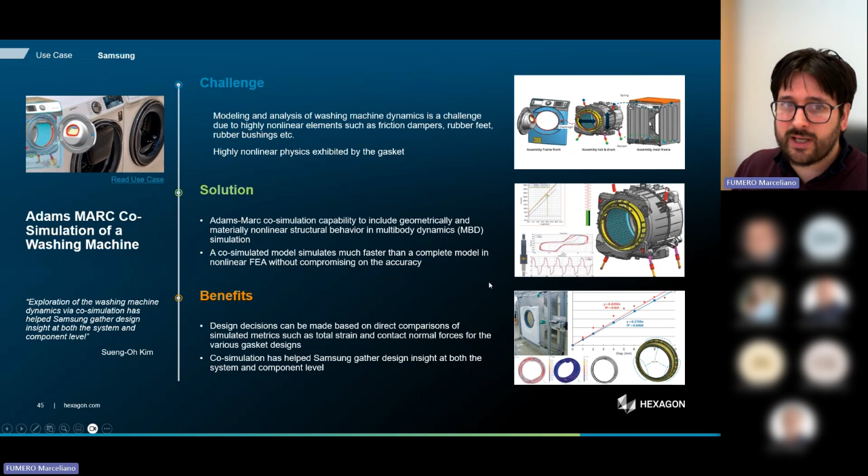I have a couple of use cases, but they are not directly related to these features because the features themselves are brand new, basically. But they put the NVH analysis part of what we're doing in perspective, okay? We don't have time to cover them, but I will share them with you. You can read through them, and you will see good examples of very advanced applications of Adams for vibration analysis for washing machines, acoustic analysis for motorcycles, vibration analysis for drivetrains. And these use cases, I'm sure, will put into context a lot of the things that I just mentioned.